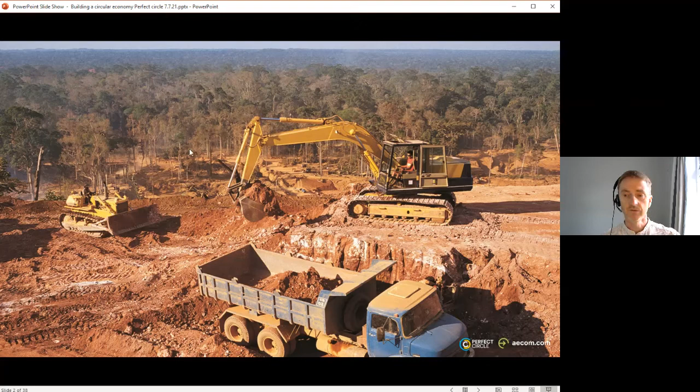In terms of biodiversity, 90% of biodiversity loss is associated with winning resources, mining, farming, and all the things that we do to the planet.

And at the other end of the scale, we are busy knocking down buildings at a phenomenal rate. We are demolishing buildings sometimes within 30 years, certainly within 50 years in our cities. And the trouble is that although we, as an industry, say we're doing great because we've got 80-90% recycling of these resources and materials.

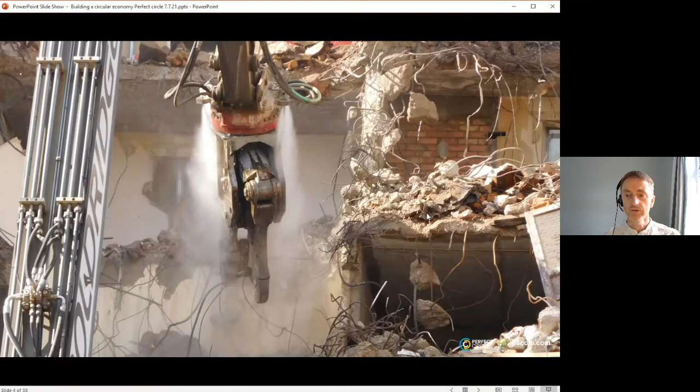Actually, it's not what I would call recycling, because we don't maintain the value of those resources. They're always downcycled. So actually what we're doing is all this structural concrete will be knocked down and crushed and used as secondary aggregates, maybe for road bases or maybe for piling mats, but it won't become structural concrete again.

So it's really important that we define our terms, I think, and even structural steelwork is often downcycled into rebar, as you can see here. So it's all a very crude process, and it's not giving us our raw materials back that we've spent all this effort and time to win.

So that's very much the linear economy, where we're digging stuff out of the ground, we're using it for a while, and then we're throwing it away. So the idea of the circular economy - this diagram builds up, but I'll briefly explain what the basic concepts are, and then I'll go through in more detail.

So the idea is that in those inner three circles, we're retaining, refitting, refurbishing our buildings. So rather than building new, if we can, because the resource use is so intense - and then if we can, reclaim and remanufacture our components, our bits of the building.

So, I mean, the salvage industry is very low at the moment. We very rarely reclaim bits of the buildings, apart from the odd chimney pots and Belfast sinks and a few things, but very little of that is going on anymore.

Remanufacturing - there's lots of opportunities to remanufacture building services and all that complex kit that we currently just throw away and shred, and we have to deal with all the consequences of that waste.

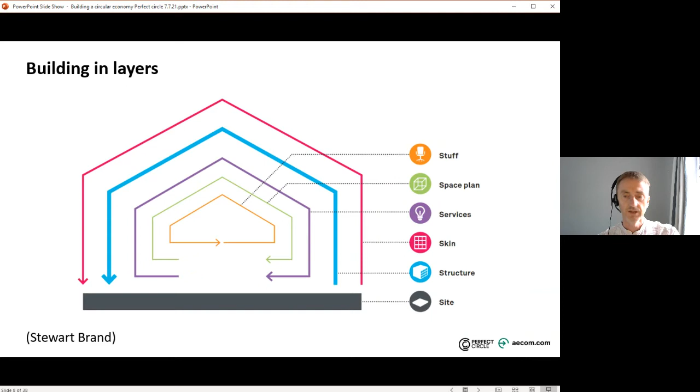Those building services might traditionally be covered up with finishes that are, I don't know, ceramic tiles that might have a 2,000-year life, and you've put behind that something that only has a 20-25-year life and might need replacing, so it has to be smashed to bits to get through to it. So the idea of shearing layers relates to all of these other principles, particularly adaptability and disassembly.

Victorian warehouses and Georgian townhouses are the classic examples of adaptable buildings that have done really well. And actually, there's quite a lot of commonality around these that the architects who were looking at found - that they're quite often rectangular plan form, which makes it very simple, nice clear floor plates that allow you to change it into different uses.

They typically have pretty generous floor to ceiling heights, and that classic sort of architectural thing that you all see in grand designs around - great space, great feeling, and great light. These sorts of buildings have that good balance between daylight without overglazing and everything.

When I spoke to them, they said they wished to add more buildings like this to be the sort of centre points for buildings. But even buildings that look like they should probably be demolished, and would often be demolished, it doesn't have to be that way. So this is really interesting.

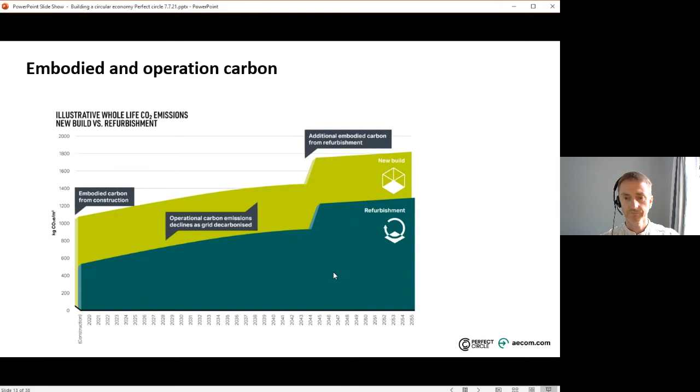And then just in terms of adaptability, these are just some examples of the sort of things you would look at - as I said before, floor to ceiling heights, where you put the cores, that sort of thing. And we've been using scenario modeling as well, something else we've been looking at as part of demonstrating the adaptability when we're looking at that from a GLA perspective, to see can you show how the building could be changed into different uses.

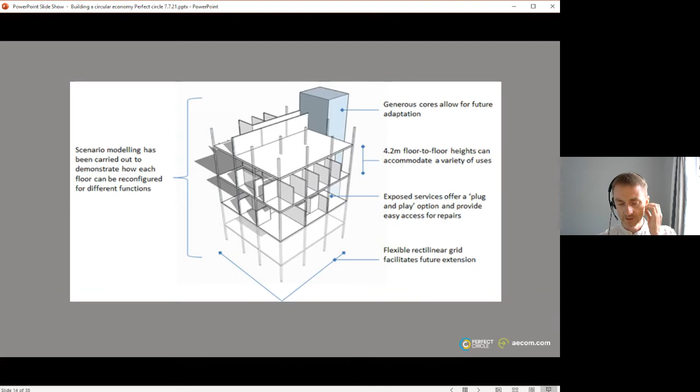Does it work? And if not, can you tweak the design a little bit? Can you shift the cores a little bit so that you can get the escape routes for the fire or whatever? And that's something we've been doing for this project - this is Moorfields Eye Hospital with UCL - where we've been looking at how we make the building adaptable and able to be used and extend the life of it for as long as possible.

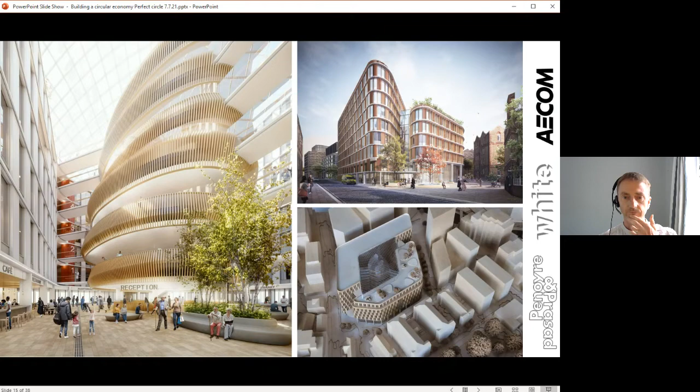So those are some of the key principles. Design for disassembly is a really tricky one, and there aren't many projects really doing this at a wholesale level. I think it's going to take a big change in what we're doing. But there are some examples.

There are some buildings that are completely demountable. So this is an example - we've looked at Place Ladywell and a few other examples where we've actually been creating buildings on meanwhile sites. They're earmarked for redevelopment in five or six years time, but in the meanwhile we've managed to put some homes there for people who haven't had anywhere to live, and these are designed to be relocated. So you can do it at the building scale.

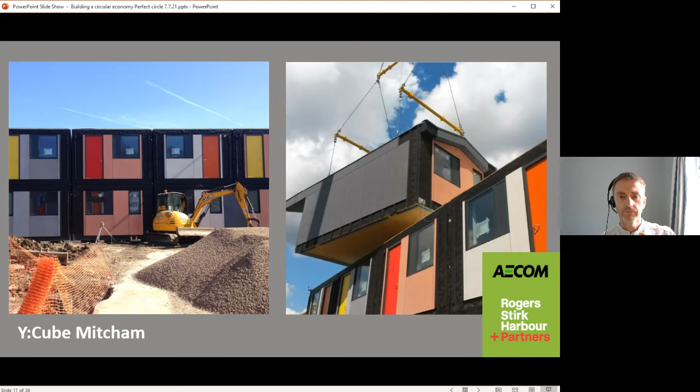And what's interesting about that as well is you can disconnect the value of the building as an asset from the value of the site, which I think is a really slightly mind-bending idea - that up to now all our buildings have been locked into the value of the site, which means as the value of the site goes up versus the quality of the building, you end up getting obsolete and demolishing the building and building a new one. But equally, this whole disassembly and reconfiguration idea can go right down to the detail.

I've got several examples of products that are out there that already get rid of wet trades, so they don't need sealants and adhesives and stuff, and can be laid dry, which means you can move them around and reconfigure them, but also disassemble them and reclaim the bits back.

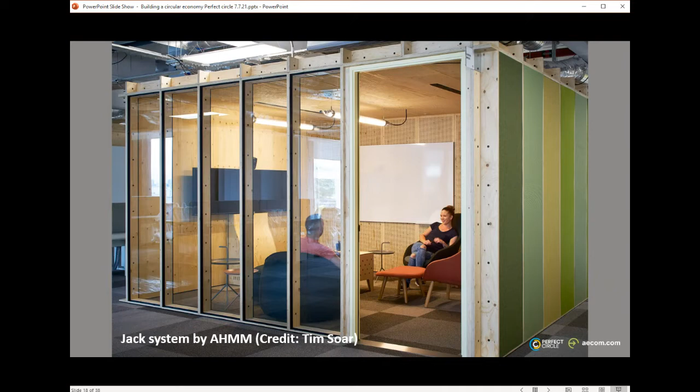This was a nice example that Google have been implementing on their projects, and AHMM and the architects have called it the Jack system. It's basically designed so facilities managers can come in and reconfigure the spaces, create new AV rooms or meeting spaces, without having to smash everything down with sledgehammers and crush up all that blockwork or plasterboard, creating loads of waste and then having to build new.

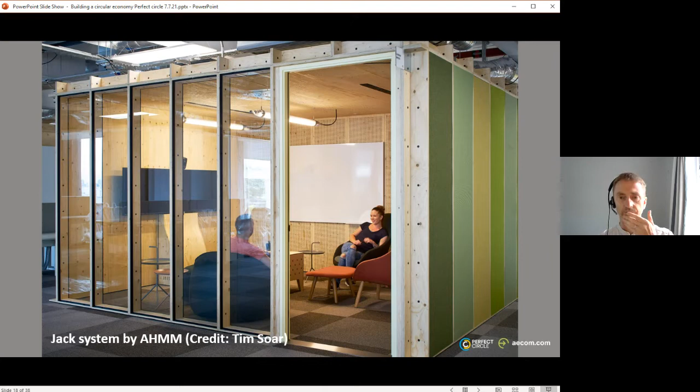And then lastly, for the principles, this is about selecting materials, which is really key to the circular economy. It's something we need to be doing as an industry - thinking much earlier about the materials we're procuring rather than leaving it down the supply chain.

There's some really exciting new materials out there, and I just love this one. This is by Biohm - mycelium insulation. You grow the insulation; mycelium is the root structure and fibers typically associated underground with funguses and mushrooms. It's fed on waste from the agricultural industry and grown in the factory. What's incredible about it - I'd highly recommend this clip if you do nothing else.

In this BBC clip, what the woman does is she tries to set this on fire. She gets the old burner underneath it going for quite some time, and on top she puts a chocolate ice. When she's finished and lifts it up, not only does it not melt, there's no chocolate residue on the surface at all. It's just incredible that this grown material is naturally self-extinguishing.

So all these issues around insulation and the problems we're having with insulants - we've got a potential solution here that has better U values and better performance than the PIR, PUR insulations we're typically using. And it sequesters carbon, actually locking carbon into its structure rather than emitting loads of carbon when it's being manufactured. Incredible materials, and I think this is where we need to be heading.

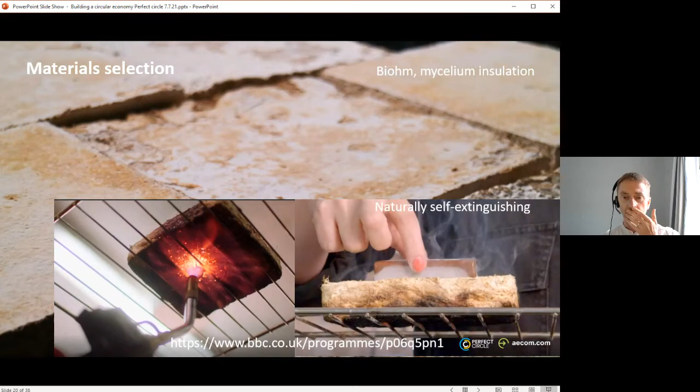And then at a far more basic level - I just don't believe why we're not doing this more. These are from a site I walked past recently, which were raised floor tiles.

If you're sitting in an office, you've got those raised floor tiles - 600 by 600 mil, standard product, pretty strong actually. But what you don't want to do is leave them outside in the rain, because they start to warp and decay. They've got a composite timber inner, then coated in galvanized steel. This is what they can look like. I thought maybe they were going to reclaim these, but they left them outside, so they can't.

I'm going to advertise these guys because there's only one manufacturer in the UK that I know of doing this, called RMF, and they are reclaiming the floor tiles. They'll come and get them from the site when they're tearing them all out - there's thousands of these things in the building. They will clean them up.

On the right, this is them testing them - they do the edge testing and everything. They re-warranty them, which is absolutely critical, because that's the thing that differentiates a reclaimed product from a new one. Typically everyone will say, well, I can't use this because there's no warranty. This has the warranty, and it has the supply - they have over 100,000 in stock at any one time, and they're getting them all the time.

Even better, they sell them back at three-quarters of the price of new ones, so you're actually getting a cheaper product, tested. Some of the older ones are actually better quality as well - they say they're stronger than the newer ones, which were sort of over-engineered. And you obviously get, I think it's a fifth of the carbon emissions associated with new ones, because you're reclaiming a product that just needs remanufacture.

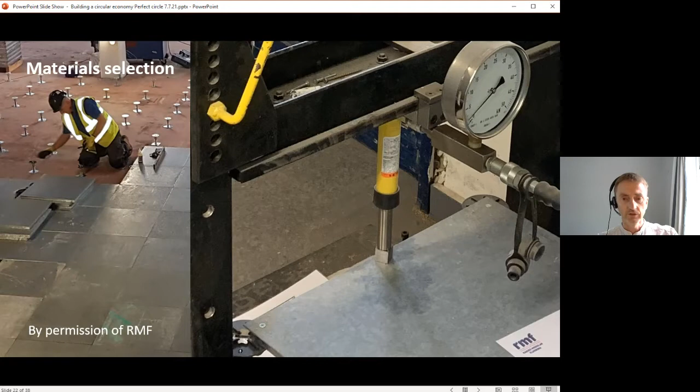So, just imagine if we could apply that to lots more things that happen in our buildings.

And then, lastly, around circular business models and waste resource, just a couple of examples. A really great one is similar to the previous example, where organisations like Paint360 and others take waste paint from the construction industry - leftover paints - and use that as raw material to make new paint. They remanufacture it, and they're actually getting long-term unemployed people into work in the process, so it's a social enterprise doing loads of great things. They've got so much waste paint being sent their way, they're having to turn it away - it just shows what levels of waste we've got.

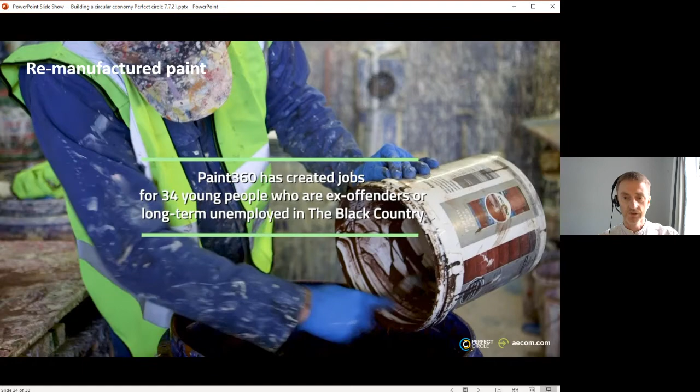Typically what happens to paint, according to these guys, is it's incinerated, or worst case, on a construction site they'll take the leftover paint and just tip it upside down on the skip, contaminating the whole skip as well as losing a valuable resource. So these guys are using the waste paint as a raw material - all it needs is cleaning up, and you have to put new preservatives in so it doesn't smell when you put it on the wall. They said what they're getting is high quality paint, because generally people spec high quality paints, so that's what they get as raw material. We're addressing three problems in one go, really.

And this is really the vision, I think, for where we could be. In our towns and cities, we could be taking a lot less raw material into our cities. It's all there - we've processed it and created this huge, intense mine, effectively, of materials, a store that we could be using in the long term. We've got that stock there, and what we can be doing is reclaiming it and taking advantage of it without having to go out and reprocess loads more and generate loads of waste.

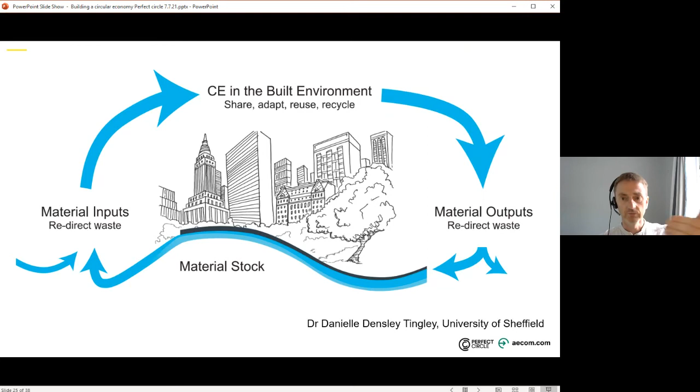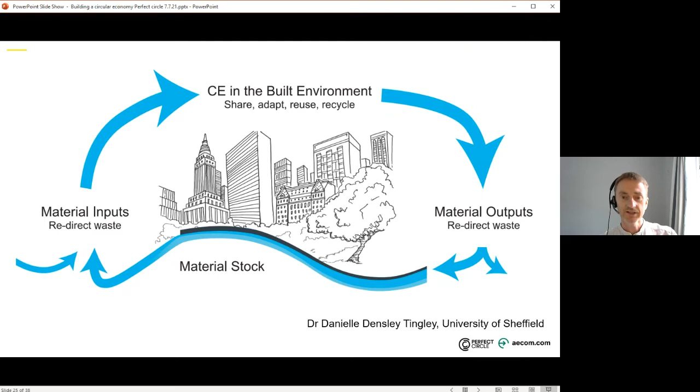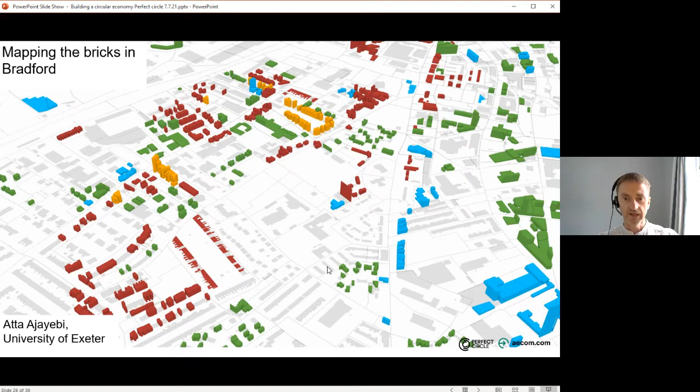Also, the regions outside London are having to deal with all that waste, which we'll come on to in a minute. An example of how we could be doing this using digital technology - this is still part of research rather than live - but a couple of people have been mapping, for example, all the bricks in Bradford. They can tell us roughly how many bricks there are and what type they are, and you could see that in the future as a time map, where you might say, we know this development is going to be demolished for a new infrastructure project or whatever. So we know all the resource potentially there that we could reclaim and use elsewhere. You could see how that would happen at a city or town level.

So that's there. Then there's a circular economy statement guidance, published last year in April, and a second version in October. We're working with the GLA now dealing with the consultation comments, and the final version will come out later this year. The whole premise is that all referable projects - anything referable to the GLA - has to write a circular economy statement setting out what commitments they're making against a series of targets, which is a massive step forward from having nothing around circular economy, only having waste-related stuff.

It's been really interesting to see all the projects coming in that are writing circular economy statements and making these commitments now.

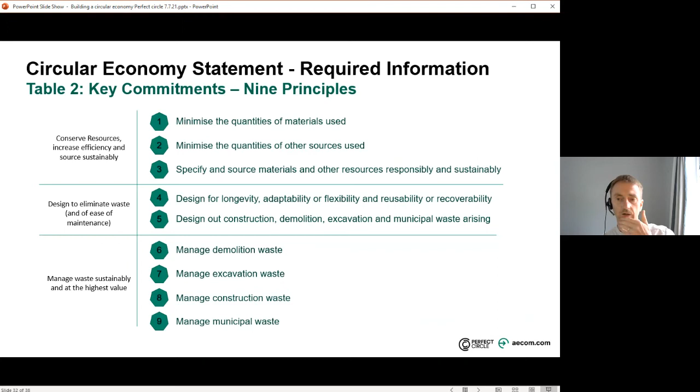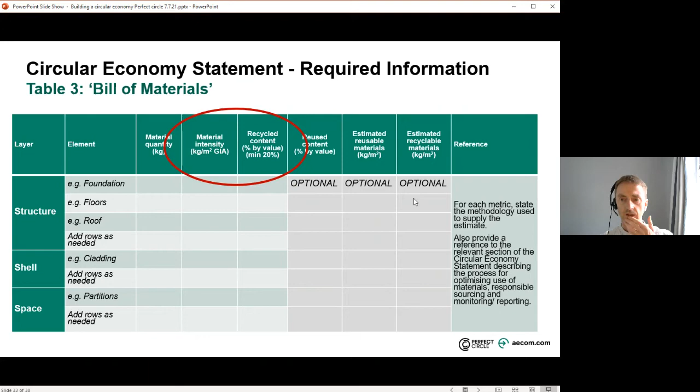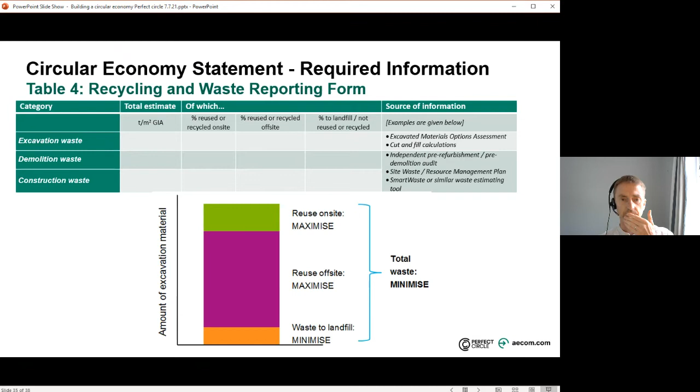So that's more or less it. Just a note - we've been doing some work with the University of Sheffield, a fantastic tool that they've created with us. We put the idea forward, and they've gone ahead and done it with a couple of their PhD students. It's something we're hoping we can help develop, and hopefully in the future it will help demonstrate that a project is more circular.

It's answering the question: how circular is your building? Because at the moment it's really hard to say that clearly, since there are so many different metrics and things we have to look at.

I want to leave you with a thought - our buildings and our cities are a gold mine of resources. We've spent all this money, effort and time, and created all this damage to the planet to gather them together into places, and then we're just leaving them, downcycling and losing their value. I think this idea of urban mining is the next thing coming down the track, where we're going to look at where we get our resources from - we're going to mine them out of our towns and cities, and hopefully keep them within that loop I was talking about earlier.